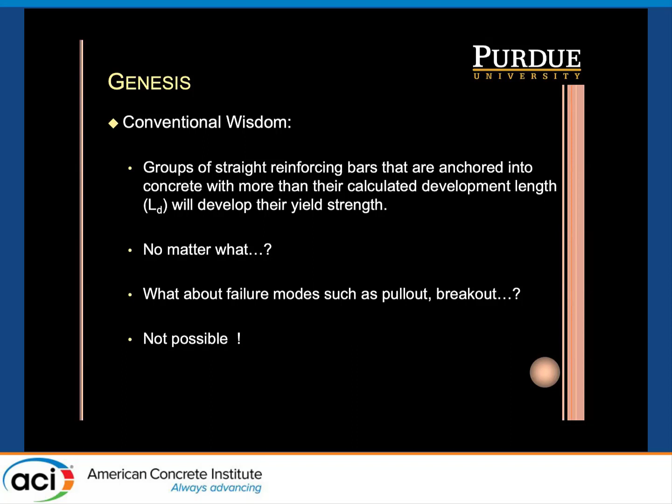Unfortunately, I found myself in a tricky situation, performing a design review of a situation consisting of embed plates that were anchored into concrete with groups of straight reinforcing bars. Luckily, John was on the same review panel, and we found ourselves in the minority, arguing against conventional wisdom, which is never a good idea. There were differing opinions in the room, but the regulatory environment was extremely conservative and touchy. From a safety perspective, since no one could point to relevant test results, we prevailed, and the design considered breakout limit states for such a design. However, it raised questions about, causing difficulties for the community by conjuring limit states where none existed.

Or in simple words, does a tension breakout failure mode exist for a situation shown here, consisting of an embed plate anchored into concrete with groups of fully developed reinforcing bars? I also want to point out at this point that there are two types of reinforcing bars that we'll be talking about throughout this presentation: deformed rebars and, of course, deformed wires, which are cold drawn as well. Both of them will be included.

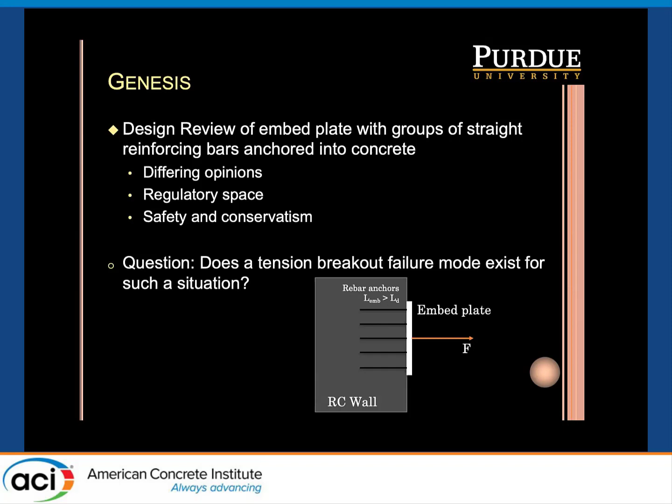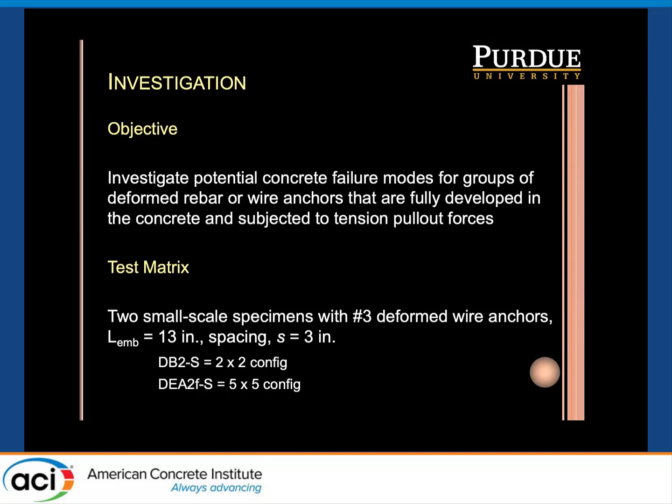So we decided to do exactly what a hard-pressed structural engineer would do. We planned to do a test to investigate the potential breakout failure mode. Now, since we didn't have many funds at that time, we decided to build two small-scale specimens with number 3 deformed wire anchors. The embedment length was greater than the calculated development length. We built two small specimens, one with a 2x2 configuration and another one with a 5x5 configuration. The spacing is noted there, and the names of those specimens are also included.

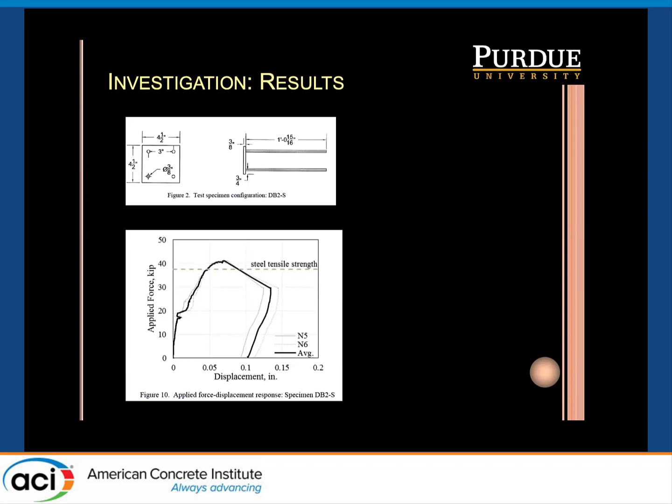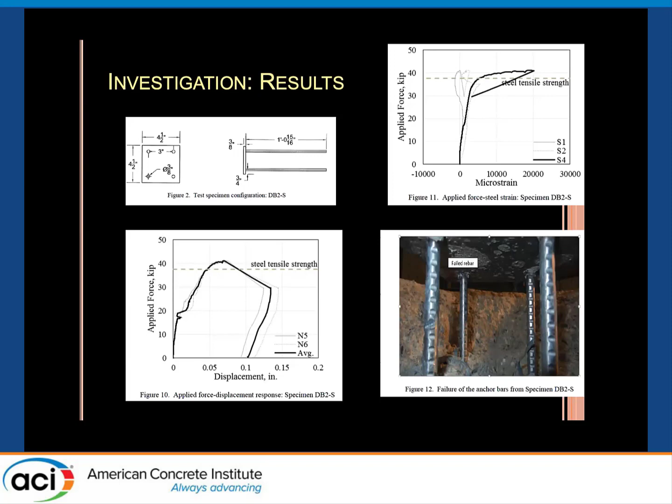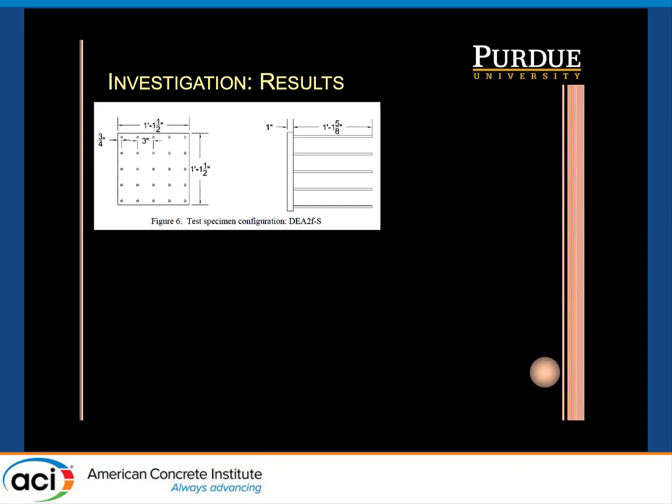When we went to the 5x5 configuration, the test results were quite interesting. This is just a photograph or a drawing of the specimen that we were looking at. Before the steel tensile strength could be achieved, we got what was a concrete breakout failure and a breakout cone that separated from the concrete.

This was the first time such a breakout failure had been observed, to our knowledge, within the realm of our limited range of experimental data that we were looking at. But it was quite significant. The steel did not develop its yield strength. Instead, the concrete developed a breakout failure.

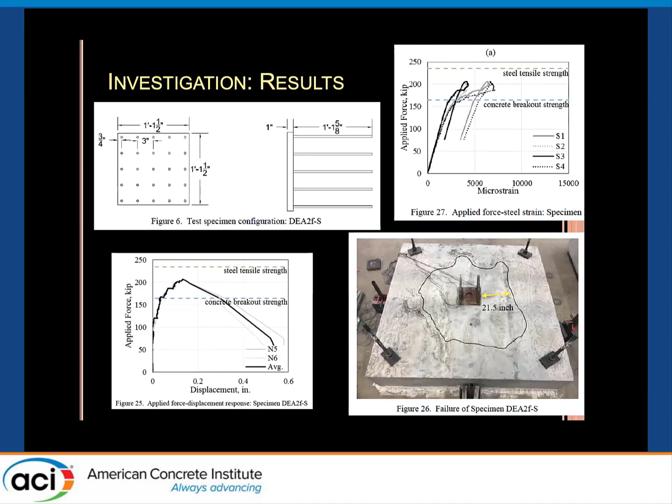However, there was a flag on the play. There was a concern that the test was small scale, using deformed wire anchors, and surely this was not going to occur in a large scale specimen with deformed rebars. So we did what any structural engineer would do.

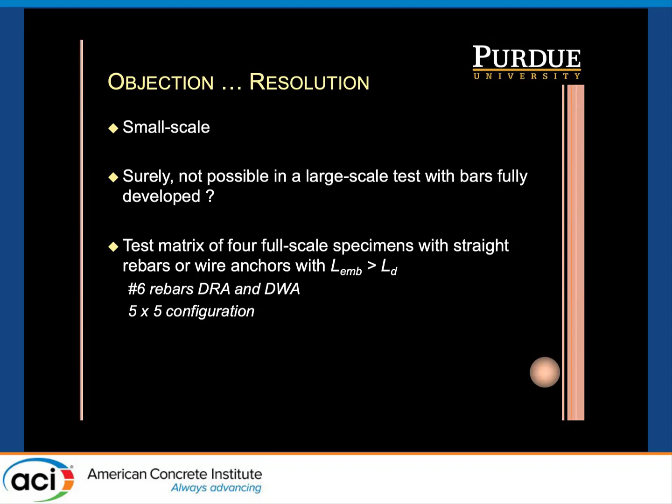We decided to conduct 4 large-scale tests with straight rebars, deformed rebars, and also deformed wire anchors, with the embedment lengths greater than the development length. In this case, we selected number 6 rebars and deformed wire anchors. We selected a 5x5 configuration. You'll see very quickly that the specimens become extraordinarily large.

This was the test setup that we used in order to conduct these large-scale investigations. There were fewer tests because they had become quite large. If you think about it, the breakout cone, if it were to develop, would be about 3 times the embedment length, which itself is greater than the development length. And while we're doing the tests in the laboratory, we don't want the tie-down points to interfere with the breakout cone. This is a photograph of the test setup with the concrete block and the hydraulic actuator, the sensors, etc.

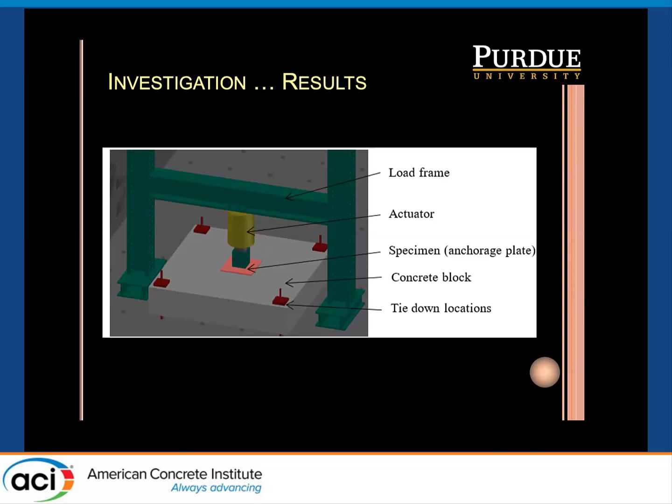Here's the photograph that you're looking at. You can see the sensors, the sensor arrangements, the actuators. And we try to make sure that nothing interferes with the breakout cone if one were to develop.

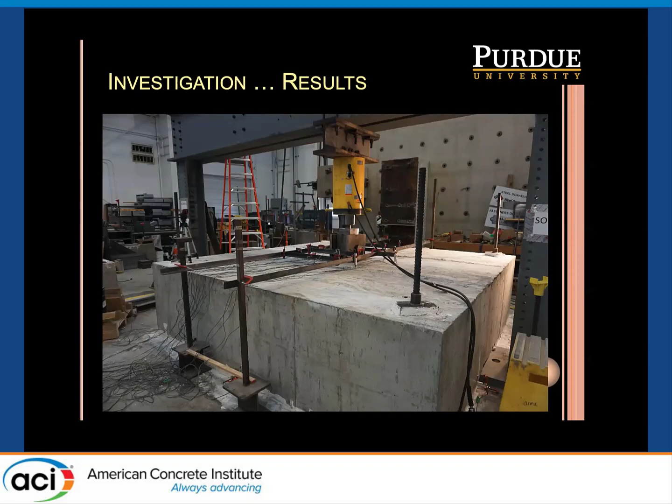So we conducted the tests, and both specimens with the deformed rebar anchors, the 5x5 number 6, both of those specimens developed breakout failure modes. And I'm showing them here to you from both tests 1 and 2. As you can see, the embedment length of the bar was approximately 2 feet, and the range of the breakout cones was in the neighborhood of about 36 to 42 inches, which is what one would expect if breakout were to develop.

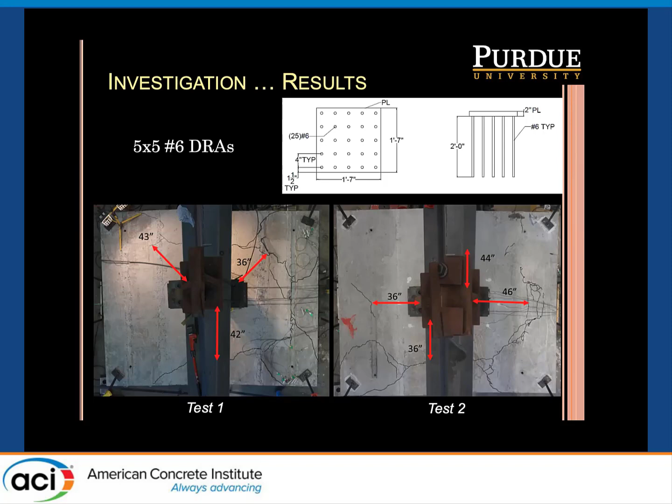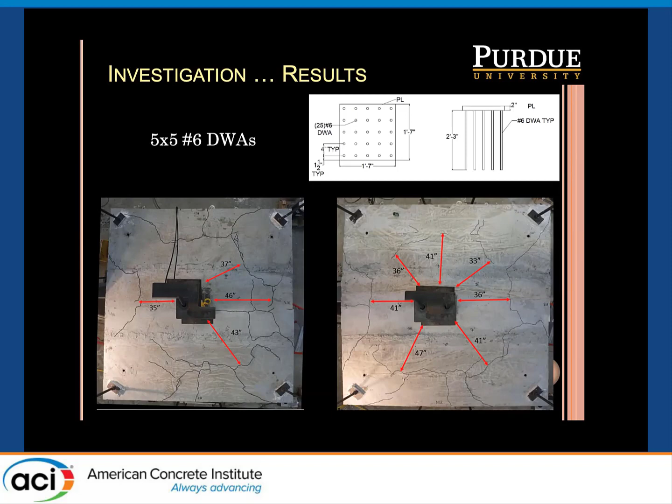The deformed wire anchors, which are slightly different from the deformed rebars and have the dimples on them, had an embedment length in this case of about 27 inches, and we saw the same sort of breakout cone develop with a range, as you look at it on the top, of about 36 to 41 inches and so on. All 4 specimens illustrated the formation of this breakout failure mode.

So what we did was we pulled out that breakout cone from the concrete, and it became quite an interesting sight. We wanted to examine some of the cone angles, etc., just for documentation purposes. But we also found the photographs to be quite compelling. And we also back calculated what would be the effective K value for the deformed rebars, which from those tests we found to be 35. And for the deformed wires, we found the effective K factor to be in the neighborhood of about 30. The photographs were quite spectacular and definitely worth 1,000 sketches of a breakout failure mode. And they've been seen multiple times in different committee settings.

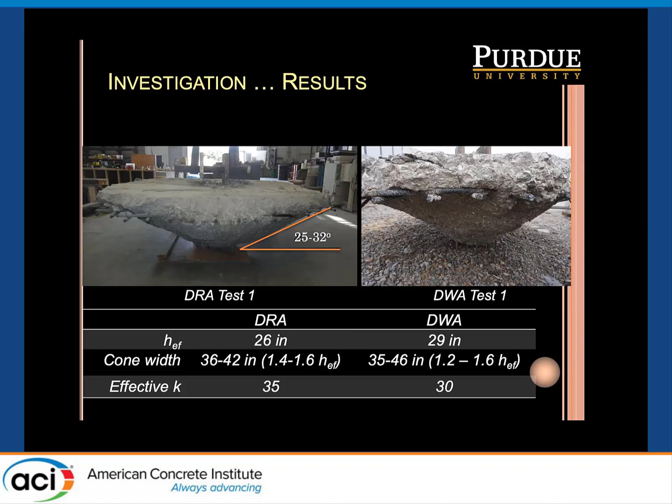There was one more advantage of this large-scale test. We actually got a chance to compare our small-scale test with the large-scale test. So we were able to put the two tests next to each other, the half scale and the full scale. And as we compared them, we noticed that they were quite similar to each other in terms of the breakout failure mode, the effective value of K, and so on. This gave us the opportunity to conduct slightly smaller scale tests, because these huge specimens were quite huge to get rid of from the laboratory, rather than at full scale, which can be quite cumbersome and also cost prohibitive.

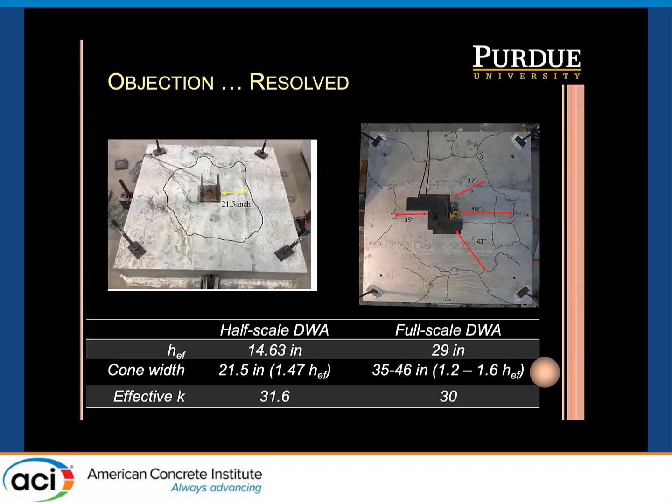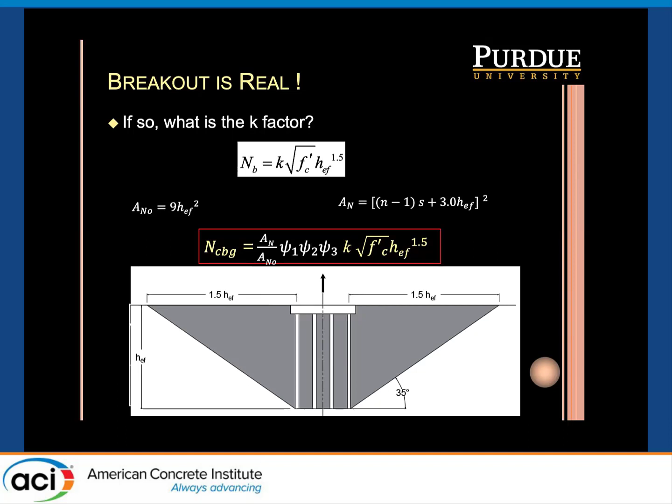So then the initial objection, which was related to the small scale, was resolved. And so the question became, what is the K factor? We could draw sketches of these breakout failure modes and talk about it in settings and say, okay, we can calculate it, but we need an effective value for the K factor and so on. These are your common breakout equations that you are familiar with. And the question became, what would be the value of K?

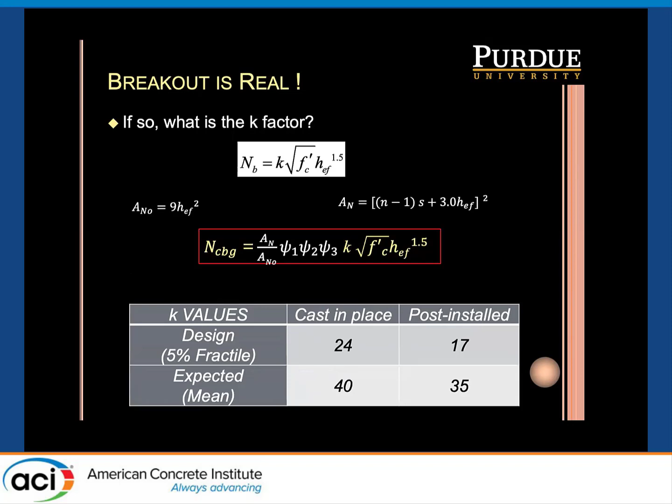So looking at some of the existing literature, we found that when you're working with mean strength predictions for cast in place, you're looking at an effective K factor of about 40. For post install, you're looking at an effective K factor of about 35.

So at this time, there was another flag on the play, and there was insufficient test data to have an effective value of K and actually be able to conduct a reasonable statistical analysis. So by this time, we had presented all this information to the 349 committee, and the committee was fully on board. And so we decided to embark on a comprehensive, coordinated testing program with members from China, South Korea, and other countries wanting to help contribute and participate.

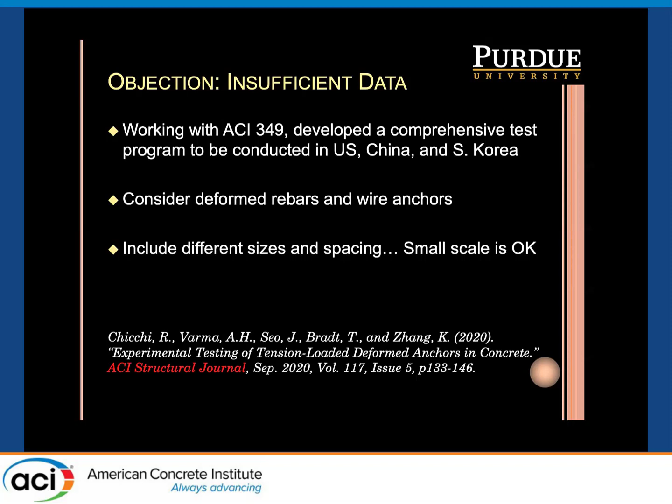We decided to consider both deformed rebars and wire anchors and include different sizes and spacing. And we came up with a very big test matrix that we then broke up into 3 pieces and sent it off to different parts of the world in order to get experimental data. Now, the story up to this point is documented in the publication listed here by Professor Chicchi. It has been co-authored by the team from Purdue, but you can read the story up to this point in that paper. The story here onwards is investigations as they are continuing in the US and in other locations.

So here in the past 1 year, we've conducted about 8 tests. Actually, we designed and coordinated a test program and requested funds from the ACI Foundation a couple of times. After the lack of success, our international partners decided to step in and help. The work in the US was partially funded by KEPCO and partially funded by Hilti. The work in China was funded by SNERDI, and the work in South Korea was also funded by KEPCO.

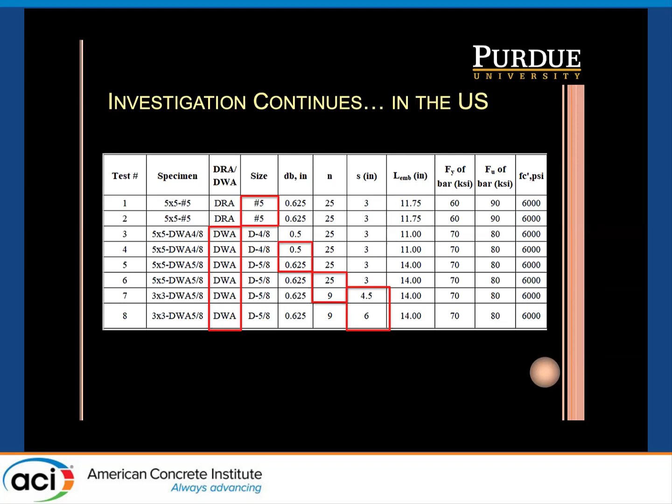The US test matrix included a couple of specimens with number 5 rebars, but the rest were all with number 4 and number 5 deformed wire anchors, and I explain that in a little bit. We used configurations of 5 by 5 and 3 by 3, and the spacing of the bars was also included as a parameter. This was all happening in 2019, which, as you know, was a difficult year for trade relations, especially with China, and that made a play in how our test matrix had to be divided up.

This is a photograph of the test setup in the Bowen laboratory as we were looking at conducting these tests. You can see it's the same setup that we had used earlier. The blocks were a little more manageable, but they were still quite big. As we were conducting these tests, we had sensors for measuring the behavior of the strain gauges in some of the rebars in some of the specimens. We tried to use the same setup for all the tests in all the countries, as you'll notice.

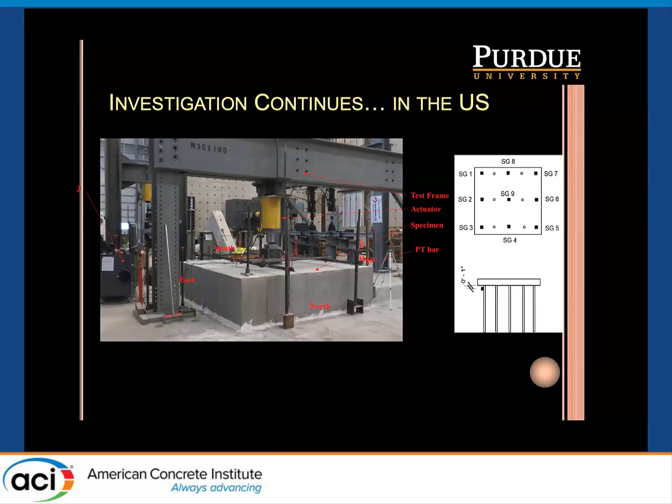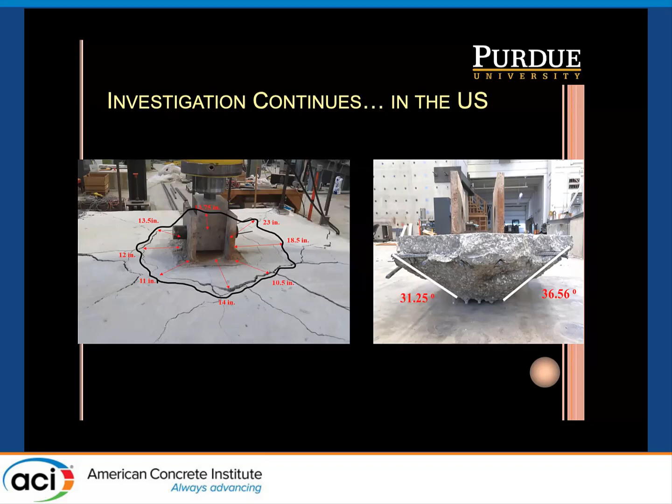So we found from these large-scale tests that we continued to get consistent breakout failure modes. And we continued to pull those cones out after failure so that we could have some pictures and make the point on what it is that we were observing. But before I move on, I want you to get a sense for how this experiment really goes and what kind of a brittle failure mode this really is.

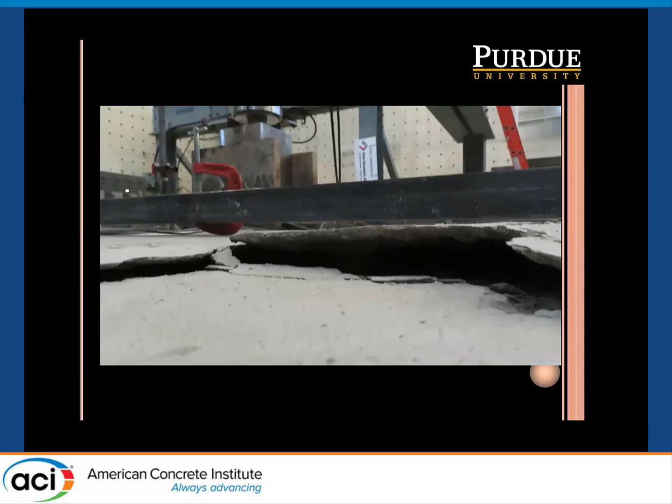Now, you can't hear the sound because the sound is playing in my headphones, and I should have thought this through earlier. But I'll play the video again just so you get a sense for how quickly, this is a real-time video, how quickly this failure occurs and how brittle this failure mode is. It's important to note that our hydraulic equipment actually cannot keep up with such a brittle and rapid failure mode. So the post-peak descending branch of the measured load displacement curves is to be treated carefully. And that's something that we are aware of as experimentalists.

This slide summarizes the results as they are now complete, at least on the US side of things. We were able to fail the specimens, get breakout failure for most of the experiments that we had conducted, and back calculated an effective value of K. Those effective values of K are shown here, and you'll notice that they're in the range of about 30 to 39 or so. We had a couple of specimens where the spacing, when it's increased from 3 to 4.5 inches to 6 inches, that you get different failure modes eventually developing the full strength of the steel.

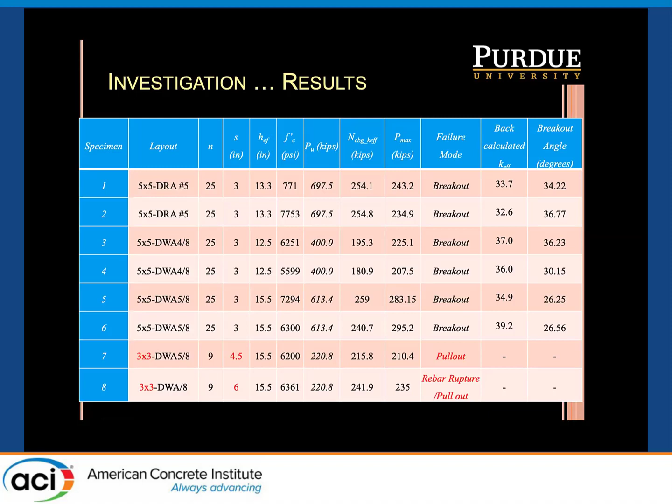But we also conducted a portion of our tests in China. They were conducted at Tongji University. Now, because of the limitation on the trade with China and the steel tariffs that were imposed, the initial test matrix that we had proposed could not be conducted. They couldn't get the deformed wire anchors, and it was difficult for them to get US rebars as well. So they ended up having to do the tests on Chinese rebars that were purchased in China.

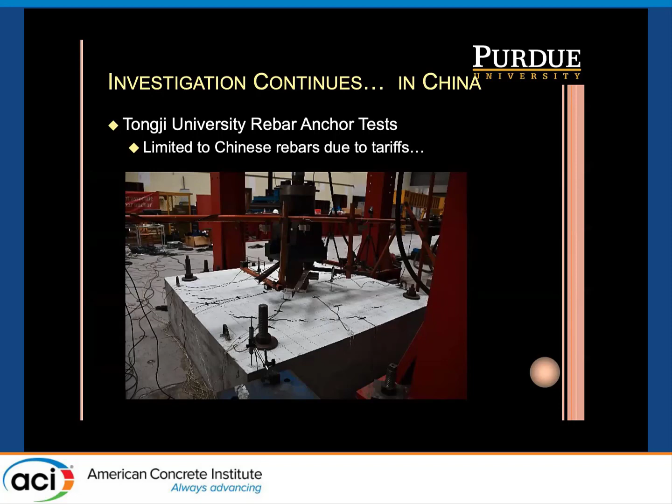Overall, the test program was quite successful. You'll notice that the test setup is almost identical to the one we used in the US. The hydraulic equipment, the sensor layouts, and all of them were quite similar. And that's because we had gone over to interact with them and make sure that the tests were going to be useful for our committee to deliberate upon. We were there for that first test where they got that breakout failure mode that you can see the student is pointing to in China.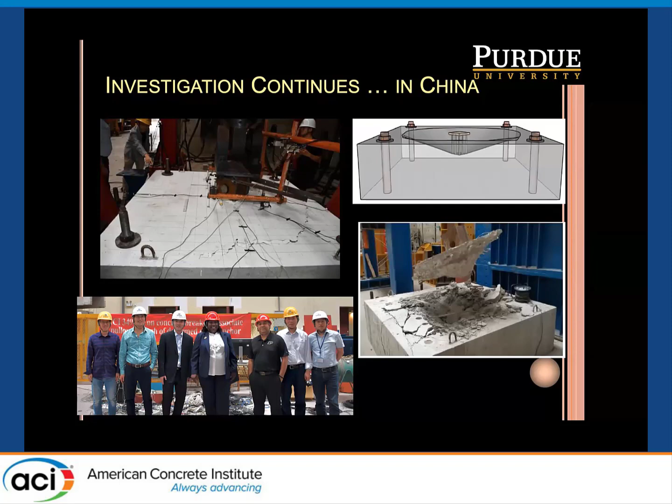This is the summary of the test results from China. As you can see, they tested mostly number 4 and number 5 deformed rebars. They used 3x3 configurations and 5x5 configurations. And they got breakout failures in most of the cases. They attributed that to the yield strengths of their rebars being quite high.

Anyways, the back calculated value of K effective was also a bit on the high side. It ranged from about 40 to 45. We're trying to collect more information from the Chinese researchers to understand the results and what could potentially be the cause of the slightly higher K effective.

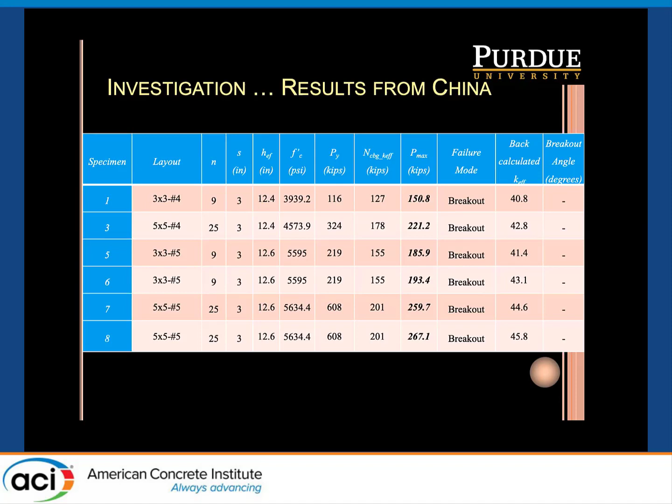But this slide actually summarizes a compilation of all the tests that were conducted using deformed rebars. This includes the original tests by Chicchi, the current tests that were conducted at Purdue, and the recent tests that were conducted at Tongji. You'll notice that we've included number 4s, number 5s, and number 6 rebars, different configurations, 3x3s, 5x5s, and so on.

And after compiling all those results, we were able to obtain a summary of the effective K values that were calculated from the results in US and China, including both old and new. We were getting an average effective K value of about 39.6. If you assume a K effective of 35 instead, then the mean strength ratio is shown there to be 1.13.

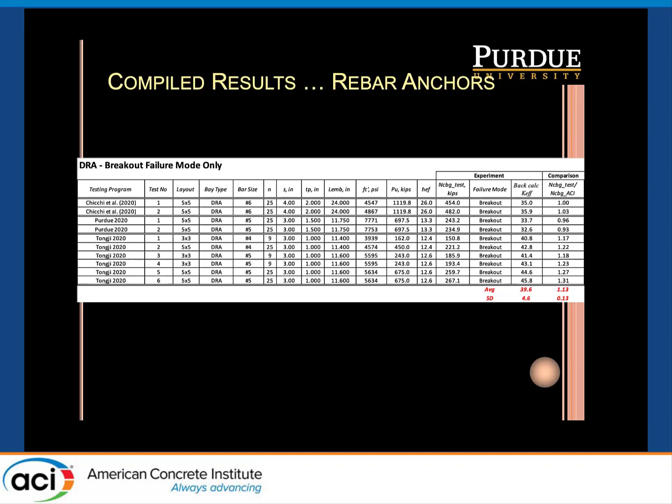Investigations were also conducted in South Korea, but there they were focusing mostly on the deformed wire anchors. They conducted 13 tests. The deformed wire anchor diameter was number 7. You're looking at the different embedment lengths and spacings that were used. Their test setup was a little bit different than ours, but their overall behavior was quite consistent.

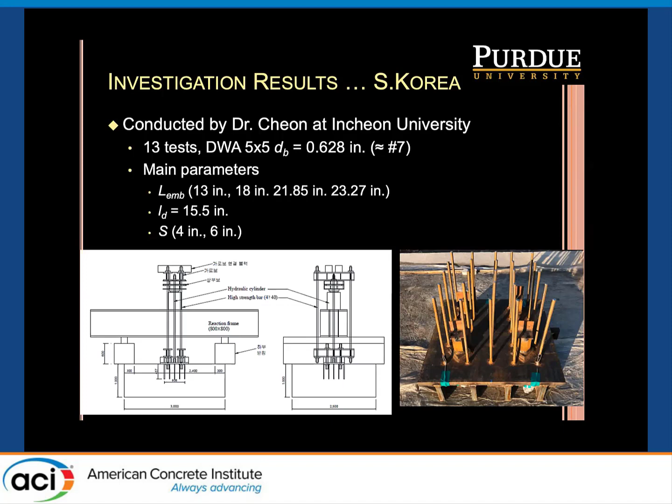As you can see on the right-hand side, there is a photograph of the embed plate with the deformed wire anchors, and you're also seeing some protrusions that were used in order to pull the specimen upwards to simulate the tension effect. The breakout failure modes and cones they obtained were comparable to the ones that we obtained in the US and in China, depending, of course, on the embedment length that you're looking at over there.

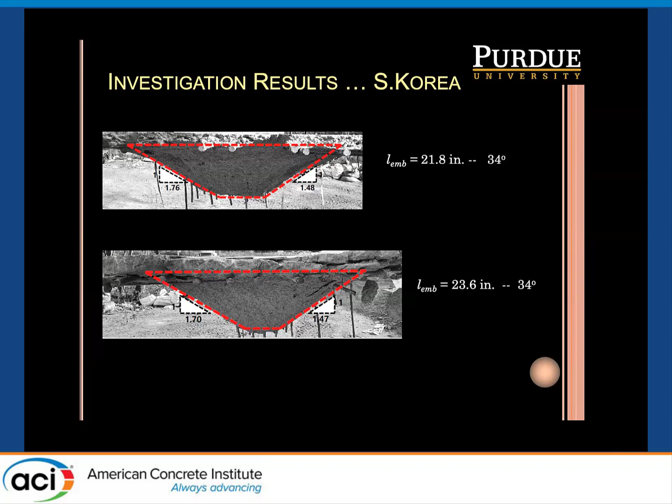They were nice enough to share this data with us for committee deliberation purposes. And we compiled all the results for the deformed wire anchors and looked at the summary of the effective K values. We found that the effective K value for all the tests, including those initially done by Professor Chicchi, the tests recently done at Purdue, and all the ones done in Korea, was about 36 for these deformed wire anchors. If you assume the K effective to be 35 in the calculations, then the mean strength ratio is about 1.03.

So here we're slowly getting to a stage where we can now bring this story home and get some closure on this topic. Here is the proposed equation for estimating the breakout strength for fully developed straight bar anchors. We're currently proposing an effective K factor of about 35. It gives you a sense of what this looks like. This was a proposal that we were looking at as part of the committee and thinking about how to approach it.

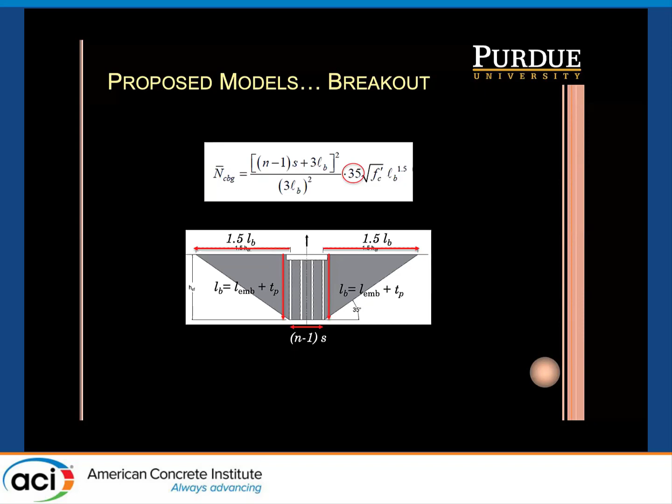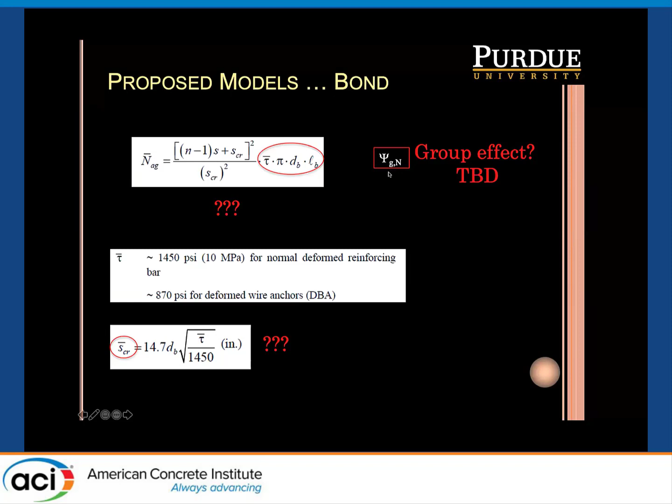One thing that I did not include in this presentation today was a whole series of pull-out individual bar tests that were conducted in order to experimentally obtain the value of tau bar. Those were conducted in the US, in China, and also in South Korea. But getting into that detail would take a lot more time. Anyways, this is the part of the story that is under development. One thing that we're particularly looking at is the group effect for calculation of this bond strength that we're trying to assess as well. And this is active work that's ongoing.

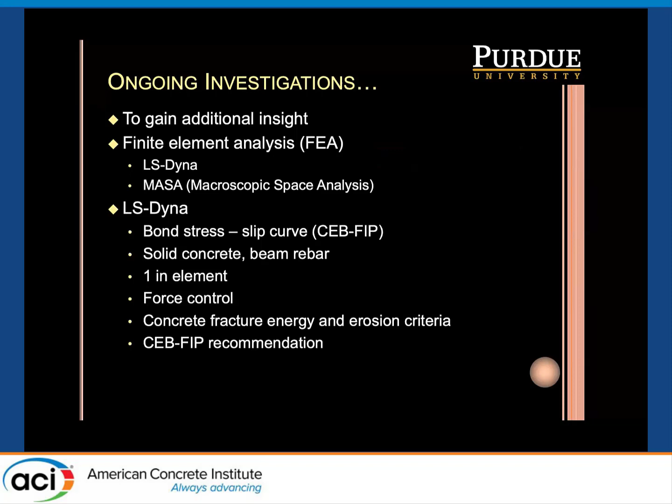Another important development was to gain additional insights into this failure mode and its mechanics. So developing 3D finite element analysis using different tools, for example, LS-DYNA at Purdue and MASA at the University of Stuttgart, became important. In LS-DYNA, we are building models using concrete elements, bond behavior, and CEB-FIP recommendations for the models for the bond stress slip curve and the concrete tension versus crack opening displacement and so on.

Just to give you a flavor for what this looks like, this is a photograph of the LS-DYNA model that we've built for some of our specimens. The results and comparisons are quite encouraging, but the models take a lot of run time. With elements as small as 1 inch in such a big foundation that we are pulling on, it's quite a bit cumbersome. But the breakout strengths that we are calculating are within plus or minus 10% of the experimental value.

When you look on the right-hand side there, you're seeing a comparison of the FEM force versus displacement response. And post-peak, when that breakout failure occurs, clearly the experiment is not going to be able to give us a reasonable value because of the issues with the hydraulic control. But similarly, the FEM, depending on whether you're using load control or displacement control, can give you different post-peak branches. And that's why it's a dotted line. Really, it's a comparison of strength that we're talking about.

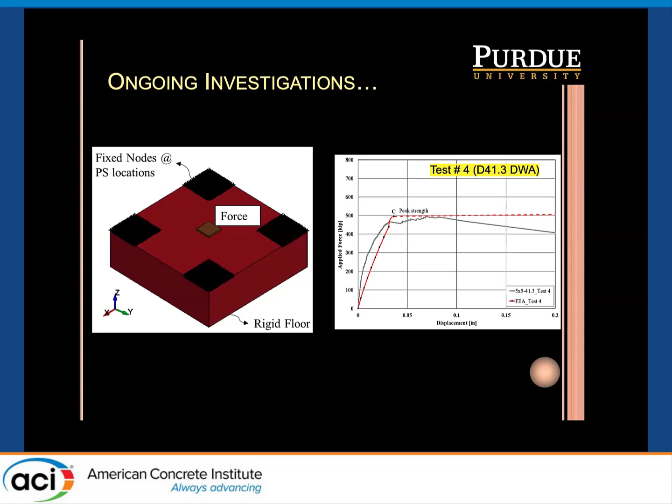And at that point C, where we're talking about the peak strength, we are drilling down further and looking at the stress contours and the principal strain plots, trying to gain additional insights and a deeper understanding into this phenomenon of breakout failure along with the bond failure so that we can put the story completely together.

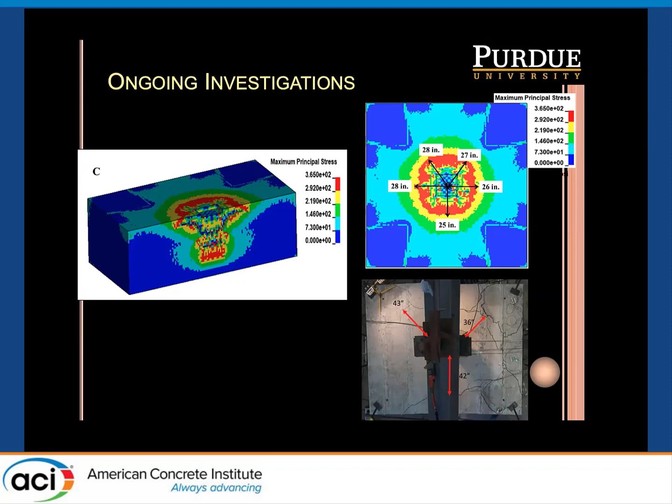Additional ongoing investigations: we've started international collaborations with the University of Stuttgart that has been very helpful, with Professor Sharma and his student Margaritis, who are using MASA to model the experimental behavior and provide unique insights into the behavior. It's really fun for us to see how these very different models, LS-DYNA models and MASA models, based on completely different numerical approaches, are comparing with each other and showing overall behavior that is similar to the experiments.

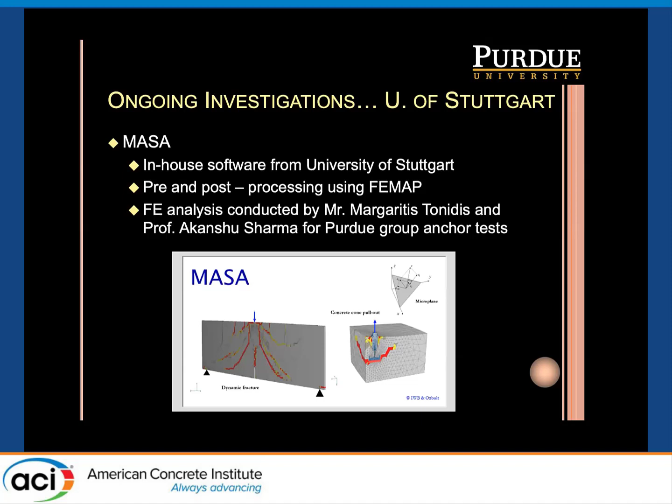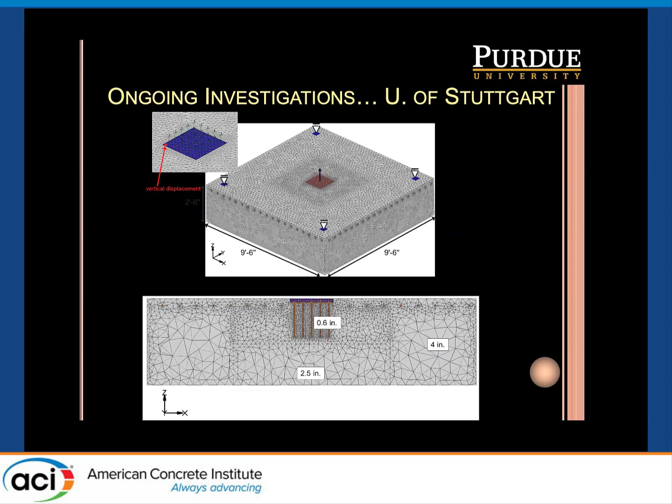Pre and post analysis is being conducted using FEMAP. The MASA models incorporate nice meshes with small tetrahedral elements that are accounting for the behavior. And they are being able to identify some of these failure modes and pull-out cones and multiple failure crack surfaces that are originating as the structure is being loaded. There's a lot of potential for us to be able to explain the interaction of the bond and breakout failure mechanisms from these numerical models.

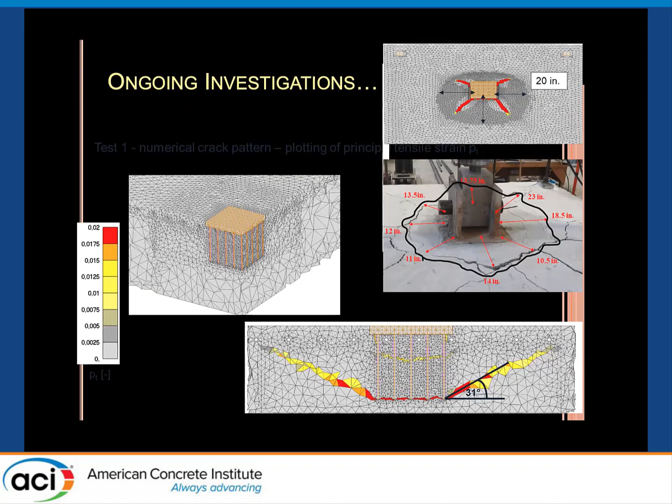In summary, I'd like to tell you where we are at in the story now. Breakout is a real failure mode, particularly for groups of straight reinforcing bars or deformed wire anchors. Now, this is particularly applicable to embed plates in concrete, however, suggests that other situations may need to be considered and thought through. The K factor for breakout strength is equal to 35 for a mean prediction. The model for bond strength still needs a bit of tuning, and we're working on that. And the numerical models can help provide additional insights into the overall behavior.

That's the story that I wanted to share with you today. I hope it was informative and at least useful for some of you.

Perfect. Thanks, Amit. We have a couple of questions that came in on the box. I don't know if you can see them in the Q&A. I can. The first question is, were broken aggregates used in the tests in Tongji? And the answer to that question is, I'm not familiar with exactly which aggregates were used. We did share the mix design, but I don't believe that they had used broken aggregates.

Another question is, does the type of aggregate, rounded versus crushed, or its stiffness affect results? That's an excellent question. I don't think I'll be able to answer that right now, because in all the tests that we did, we used a specific type of aggregate. It's something that I need to take into consideration in the future. But that's also another question that we can ask of overall breakout failure modes, whether the type of aggregate has an influence and how much it affects the results.